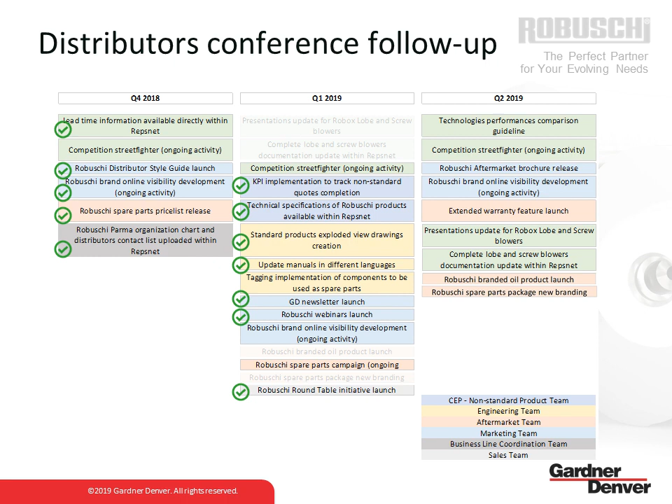So overall, still on time, and still good progress in my view. A lot of new things happening that were not present before, and a lot of supporting material for you all to make sure that you're supported in the right way.

So if I look now at the CEP side - CEP is the non-standard part of Robuschi, when we quote products that are not standard. The team sitting in Parma, led by Stefano Santelli, who I'm sure you all know, has been working intensively in the past month to set up processes and procedures in the way quotes and projects are handled, to streamline everything and make sure we're as efficient as possible.

One of the things we started doing was to track performance, so now we're able to know how much time it takes to quote a non-standard product. As you can see at the top of the slide, some KPIs have been put in place to target the team with a turnaround time, and the goal is 2 weeks. So 2 weeks is basically the time we're aiming for from when the request has been sent from you guys to the moment the CEP team quotes it.

It's a challenging target as an average because, as you know, some projects are very complex and heavy to manage with a lot of specifications. So the 2-week number is the average, because some projects are also very light - we're talking about a very small modification that shouldn't take 2 weeks to quote. So it's an average time.

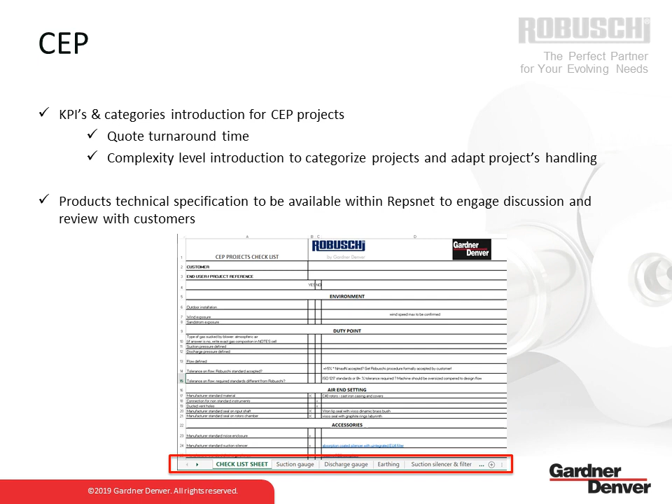On the table, you have the possibility to see more details on what the standard material and components are, and also to change it manually if it has to be something else based on the specification. I've highlighted the bottom tab, which I want to show in more detail. So for example, here you see the component specification for suction gauge, discharge gauge, and earthing. You need to know first what we supply in standard to discuss with your customer and see if it's acceptable.

So the checklist will not only allow you to list out what has to be customized based on which specification or parameters, it also includes what we are supplying in standard. So for example, on a project, if your customer says we have a specific gauge to be used, you could directly look at the specification in standard and discuss with him if this is acceptable or not.

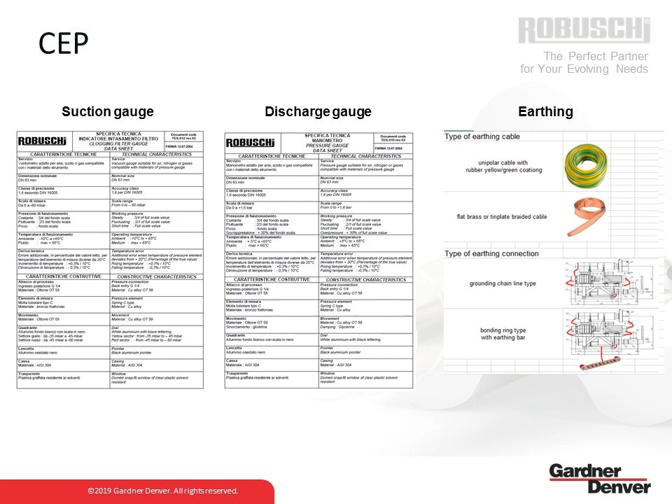If it's not acceptable, no problem. You just have to fill in the checklist according to the customer specification and send it alongside the project request to Stefano's team to be quoted. So it's just to give you information on what our standard product specifications are, to use as a baseline for discussion to see if it's good enough for the customer, or if it has to be customized. I've also put the rest of the information available in the Excel spreadsheet.

So you have suction silencer, discharge silencer, safety valve, and paint spec, which are typically the type of information people are looking for or asking us to modify. It's just a baseline of what our standard product is composed of, and then to discuss with the customer.

So this is a lot of good information. I'm sure that for those of you who have been dealing with Robuschi for a long time, you've been asking those questions and probably already have the information. Some of it comes from the manuals, other parts are being created. It's just a nicer way to have it centralized and formatted in one single document, based on the product you're looking at.

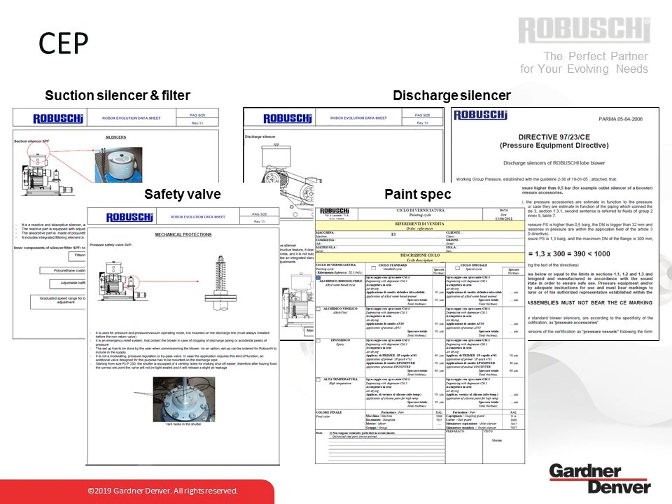All right, so that was it for CEP. Moving on to exploded drawing - that was a big point we discussed in Italy: how to know what parts to replace and what is what. So the request was to have exploded drawings or parts lists, as some of you are familiar with, which did not exist in the past and needed to be present to facilitate service, parts, purchasing, and so on.

A lot of information is now available and being done, and I will show you some examples. We are also updating the presentations of the standard products to include these documents, which you will see as a Q2 result, so for the next quarter.

But I wanted to give you a hint of what's already available on RepsNet, and what information you can find as of today. You see here on the table everything available in terms of exploded drawing for airends. The one missing is the RVS vacuum pumps, but they should be done within the next two weeks, so just a few more days to wait.

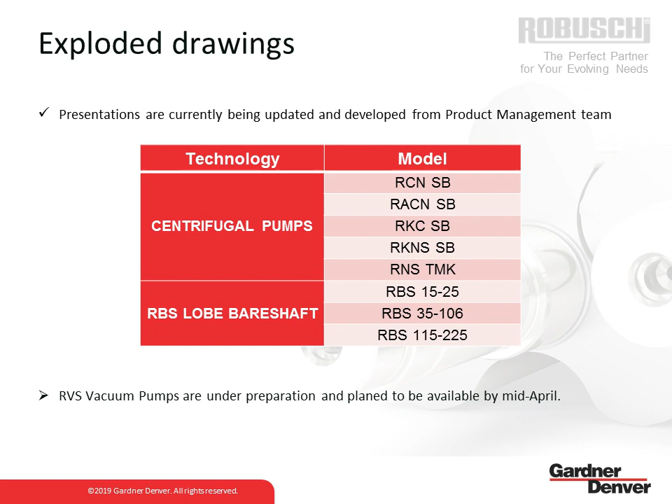So let's go to the practical side - where to find it? On RepsNet, if you go to technical data, then spare part list and parts drawing, this is where you will find the information. You go there, then as usual select the brand, the technology, and then look at the documents available. I took the example of the RBS, which is a popular model that I think all of you are familiar with.

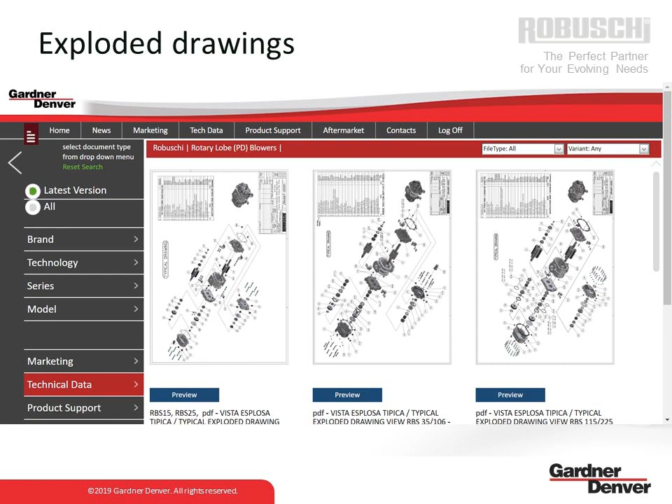You see here some new exploded drawings that did not exist before. The ones I've seen in the past were more cutaway style 2D drawings where you could see just a few parts, and it was quite difficult to read. I'm sure you see nothing right now, so that's why I used a more zoomed in view - you can see here what it looks like. It's a traditional exploded drawing, 3D, where you see every single part with a reference number and a description.

So it's quite a good step forward, to be honest, in order to have more understanding and a better reference when it comes to parts constituting our airends. And I'm sure, I have no doubt this will help you.

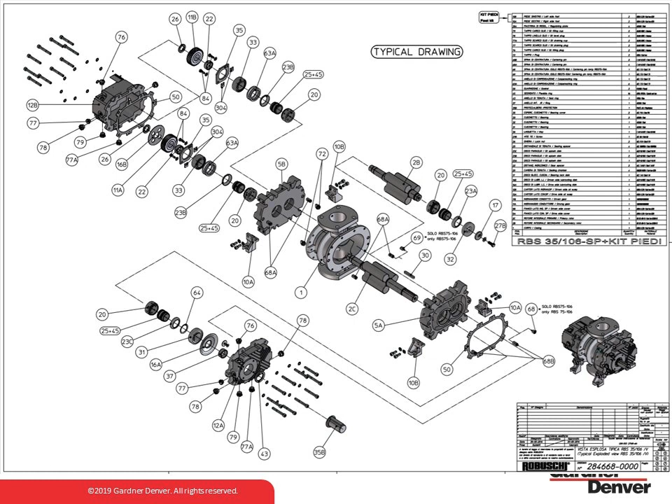Just because I can appreciate that you can't really see what's in the table, the top table, I wanted to explain something about it. I've extended it as well so you can see the table is built like this. You have the reference number coming from the drawing, a description—so the first one is left side foot, the second is right side foot, etc.—then quantities used to build the machine, and information about the material.

One of the things you could wonder is, where's the part number? Where's the part number of that particular part that I can directly give to Bruno in order to have it ordered? Well, this is the challenge.

As you know, we have a very broad range, and it's just impossible to create exploded drawings for all variations of all our airends. So the approach we took was to have a generic and standardized drawing for the technologies, referencing it with a generic name—left side foot, right side foot, regulating plate, etc.—and a code that could be sent to aftermarket alongside the serial number of the machine you want to service, to order a part for. You'd say, okay, I have this machine, serial number XYZ, I need to order a right side foot, which is reference 10A from drawing XYZ.

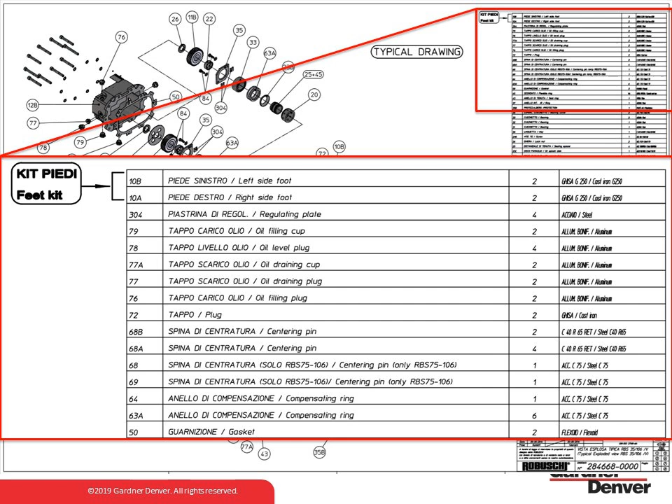So at least we will have the same baseline to reference with the drawing numbers and descriptions that we can all share and use in order to get parts quoted and sold.

I've also just used it to show an example of a liquid ring pump, as you can see, and a centrifugal pump, as you can see here. So I strongly believe this is a good step forward.

There's still work to do. We still need to get familiar with the process and use it. But as of today, the drawings are available on RepsNet. I definitely advise you to check them and see if you have questions or comments. But they're there and you can use it.

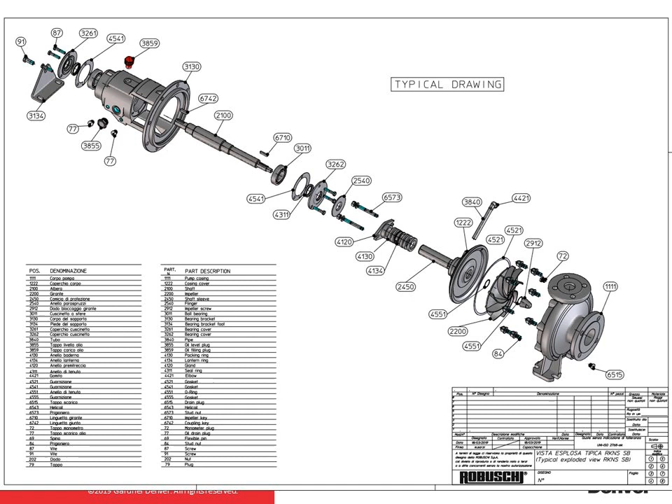Okay, I see no questions so far, so I will keep moving on.

Documentation. So yeah, that was another big point we discussed during the conference—how to manage having all documents in all possible languages required throughout the region. Well, of course, this is not possible to be done all at once. It takes time. But there is a possibility, and more importantly, now there is a process.

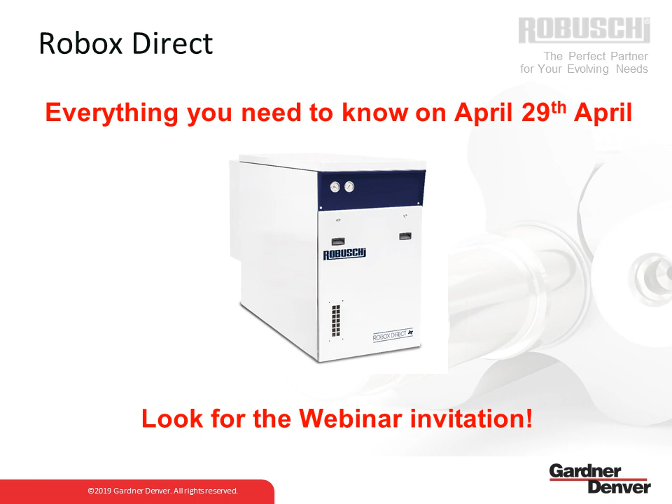One last point regarding products, Class 0. We've been discussing it a little bit in Italy. Just wanted to tell you we are very close to completing the activity, meaning we've been testing lobe and screw airends, having TÜV Rheinland come and perform and witness the test. They've confirmed that we successfully passed according to ISO 8573, which is basically what qualifies our airend as Class 0. We have received the draft certificate, as you can see. We're just validating it internally, making sure it's okay, and I would say that probably within this month, sooner rather than later, these will be finalized and communicated to you all. So it's a good step forward to align with the expectations from the market.

Class 0 has been around for quite some time, and I know some people are asking for confirmation that our products are Class 0, so they will be available. Just so you know, we haven't changed anything on the products, we just had them tested. When I say we haven't changed anything, I mean we didn't do any adaptation compared to what the products were before in order to have them Class 0 certified. It was just a matter of having them certified by the right body. We used one in the past that was a bit more cumbersome to use, so now we just followed what others are doing, because Aerzen also uses TÜV Rheinland to do so.

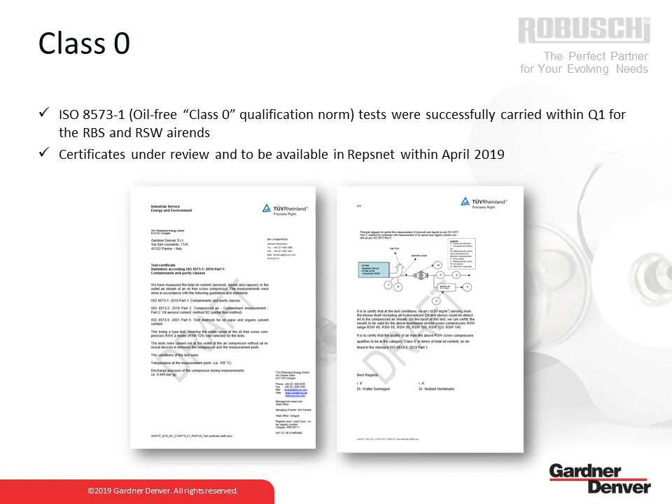So, aftermarket. This is the moment where things now are going to get interesting. I'm going to host this one live. Nora, I hope you can hear me, and I hope everything I'm going to say and promise will not harm you. I'm joking. I've looked at the presentation and been part of the emails exchanged with you all, so some of the things you're going to see here have already been communicated and should only be a statement of what has already been done.

Liquid ring service kits. So those kits are now available for order, and you have the prices that have been sent. The details are all available on RepsNet. So it's just the normal way it's supposed to be.

It was not existing as before, and Nora put together the process where you can now see on RepsNet the details, the technical information of what the kits are composed by. You have the price list also to price them to your customer, and you can order them directly to the spare parts team. So huge improvement and step forward for those products that are quite popular, and for which we receive quite a lot of questions and requests for spare part ordering.

So this one is being checked. Now we can move to the next one.

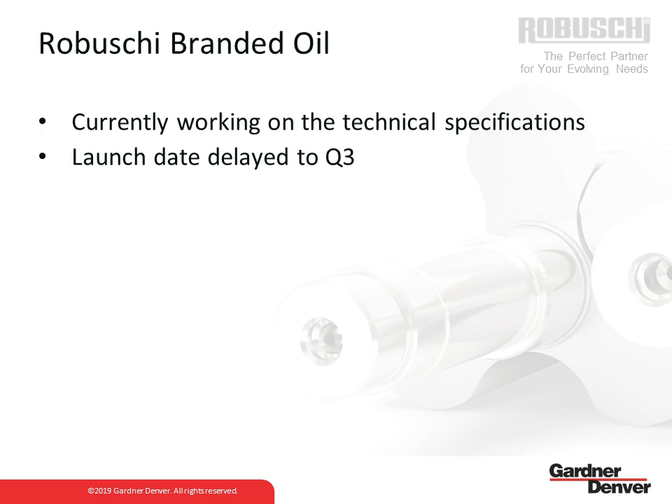Huge part here, training. I think you are all starving for training, and the sessions are being built together, the training courses as well, and Claudia has already been sending the information to you in order to advise what is available and when. So starting this September, there are sessions being scheduled, and the details are on RepsNet.

Neil, I see that you are raising your hand. Yes, if you have a question, don't hesitate to type. I'm going to keep talking until I see your question.

So the training, okay. Any sales training for distributors? That's a good question. It's very product training.

As I mentioned in the previous webinar, from a product point of view, we're going to use the first semester, Q1 and Q2, to update the presentations and revitalize them, making them nicer, concentrating the information all together so it's not spread around, as I explained on the CEP part.

Semester 2 will be the moment where we're going to start rolling out training, so there you'll have more information on what will be available. I don't know yet how we're gonna do it, whether webinars, Skype calls, on-site training locally, or in Parma. We still need to discuss it, but the starting point is having the material ready.

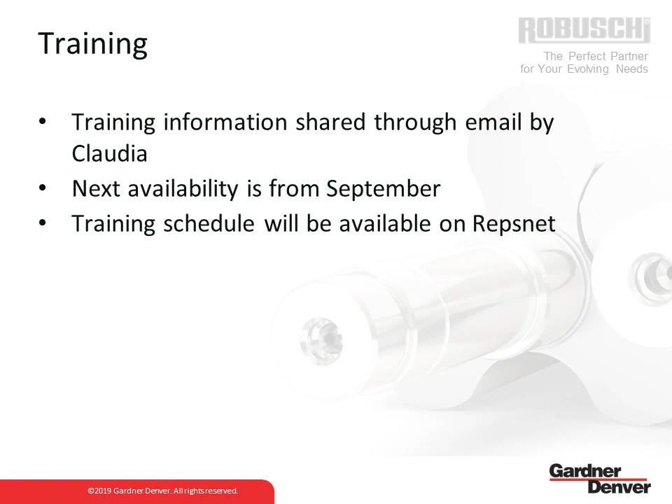Last point on RepsNet that Nora put together. So you see here what has been uploaded recently. It's a great way for you to know what has been added to RepsNet, since you don't necessarily see it unless you go and check regularly what has been put there.

Now you can see that not only the liquid ring kits that I presented a couple of slides before were uploaded, but we also have RBS's kits for the entire range, a pretty important model to account for, as well as the Robuschi T's and C's for service.

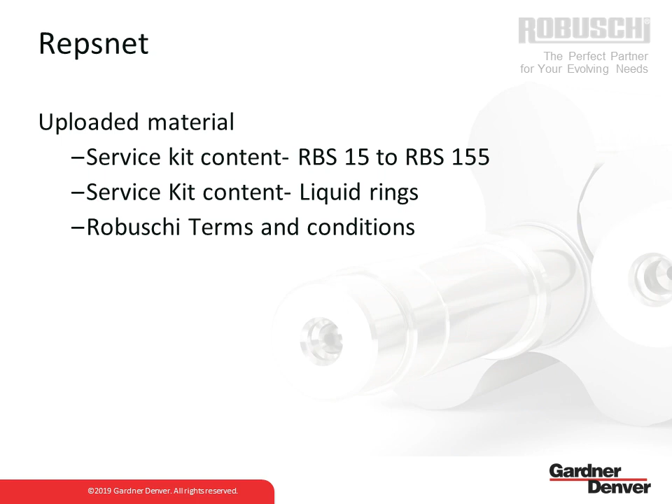Make sure that you also use them in your quotes, and that you check them too. It's a pretty important piece of document to be considered. All right, so that was all for the aftermarket side. I can see I'm running a little bit out of time, just a few slides more.

Now I'm gonna present you the marketing update. We've been launching some web campaigns, some of you have been part of it, I've seen. For the aquaculture part, that was one of the big key vertical areas for the past year and also the first quarter of this year.

I can tell you it will never go away, as business is taking off, and feedback is getting better and better.

We're getting a very positive trend in this market, and I can take the opportunity here to tip my hat to Magnus from Norway. He's an active stakeholder in all of this, so I'm sure you're probably smiling right now. It's a pretty interesting story, and down the line we'll be able to share more information explaining what's been happening behind the scenes and the results we've been getting.

So of course we're not only talking about Robuschi here. I'm going to digress a little to Elmo Rietschle. We're looking at Gardner Denver to attack this vertical that isn't really PD blower-ish.

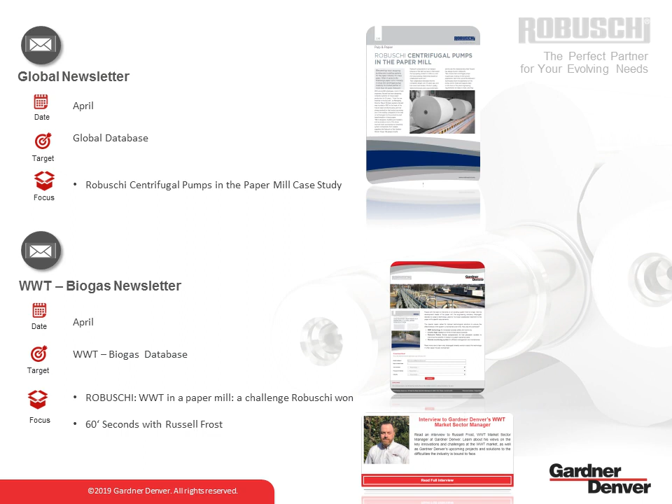So you're going to see them coming to your mailbox. The intention is definitely not to overload you. We're also going to send them to some customers that agree to receive those - of course, we have to ask first. And that's going to support all the initiatives we're having in the background.

There's also going to be one dedicated for distributors, and this one is going to be pretty important for you all to focus on, because we're going to summarize and present everything that has happened and is going to happen in between newsletters. You'll know what trade shows we've attended, events we've been doing, new material available and documentation - everything you need to know that's been uploaded or happening, all the successes in a very condensed way.

Brochures have also been updated. They're now available on the website. And as we presented in the last webinar, you can also customize them using your own logo with the Robuschi distributor style guide.

Not a lot of you are buying into the initiative, but I'll restate and emphasize that it's a very impactful way. If you still don't know how to do it, or have questions, go to Christina and ask her, she'll support you. We definitely need you guys to use it because the tool is available and impactful, and we're more than happy to support you.

So I'm just going to recap very briefly. I went over time, we had some issues at the beginning, so I'll say it was okay that I took a bit more time. We went through activities completed based on the discussion in Gardaland, focused on non-standard product processes and new documentation, drawings, exploded views, that will help you reference parts better to be purchased through the Spare Part team in Brno, and how to order documentation in languages that don't exist.

A small teaser about Robuschi Direct, launching in three weeks now. Some preliminary information about the Class 0 certificate, which will be populated within this month. All the aftermarket initiatives being launched, service kits, promotional campaigns, marketing brochures, and trainings. A lot of activity there and still more to come. And all the supporting documentation from marketing, webinars, newsletters, campaigns, and trade shows that we've completed and will complete in the coming month.